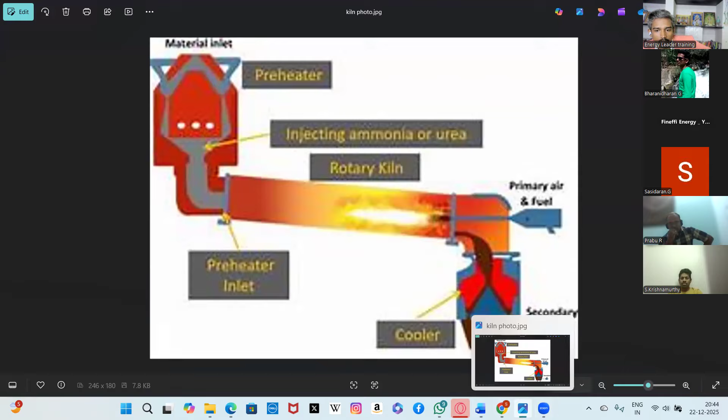There the primary air and the kiln is burning, so that 30% coal is consumed. The major consumption area is where 70% is used. So we are planning for both kiln and fluidization chamber, where carbon powder can be supplied. I am trying to combine both as 150,000 metric tons annually consumed, and taking only 10% of carbon powder to be mixed with the Indian coal, to see how much savings I will get.

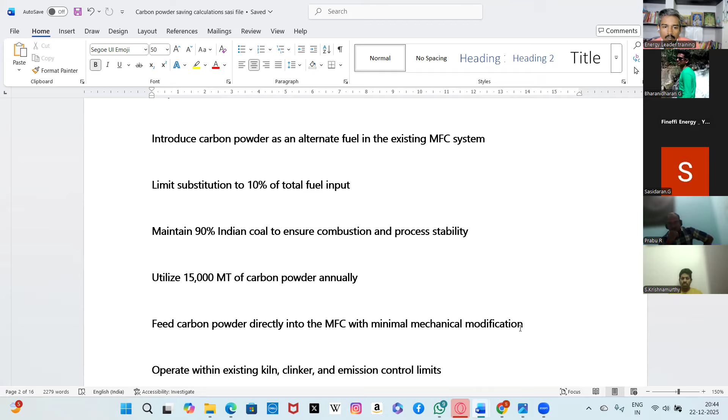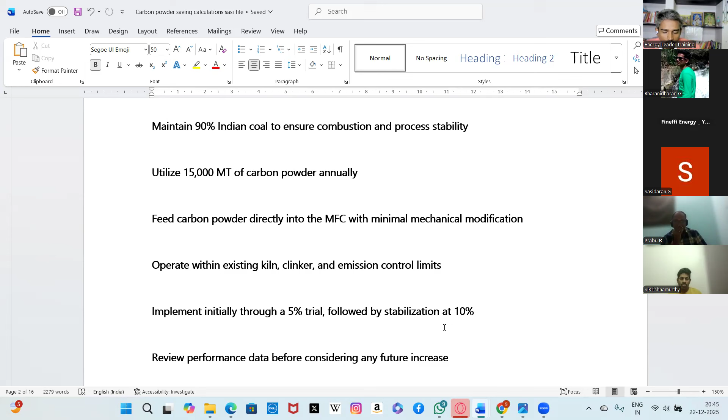So that is the proposal I have made. Carbon feeding is, in today's cement plants, an alternative fuel which boosts the Indian coal to reduce its consumption, without affecting our production parameters. First trial I am trying with 5%, and later we are going for 10%. I have the calculation for the 10%.

The explanation part is coming below. I have done some small problematic questions, through which you can understand. It involves a fluidization chamber and raw meal powder.

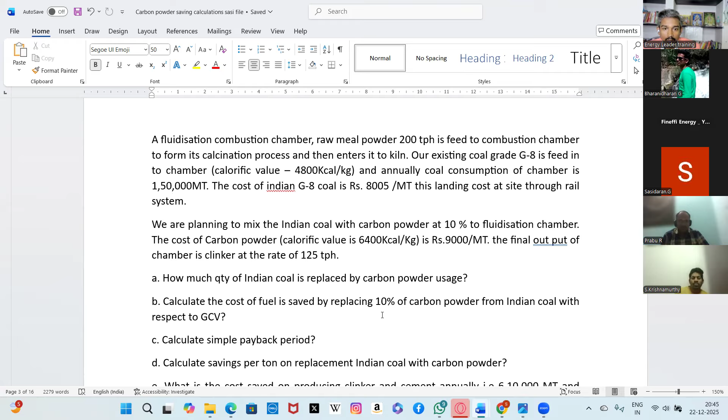What we are heating is the raw meal powder, having 200 TPH, and it comes out as 125 TPH. As I said earlier, limestone we call raw meal powder, which has a residue of 2%. It is sent to the fluidization chamber.

Input is the raw meal, and coal gives the heat to convert it through the calcination process, then it is sent to the kiln where clinkerization forms. To this fluidization chamber, I am planning with coal of 20 TPH at a GCV of 4,800 kilocalories per kg. Here I am substituting 10% for both the kiln and the fluidization chamber.

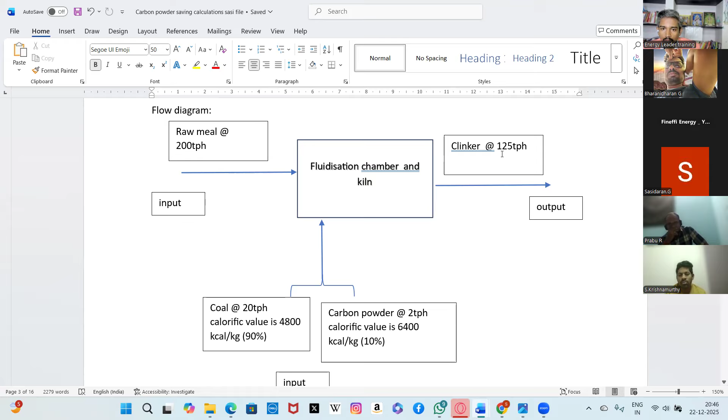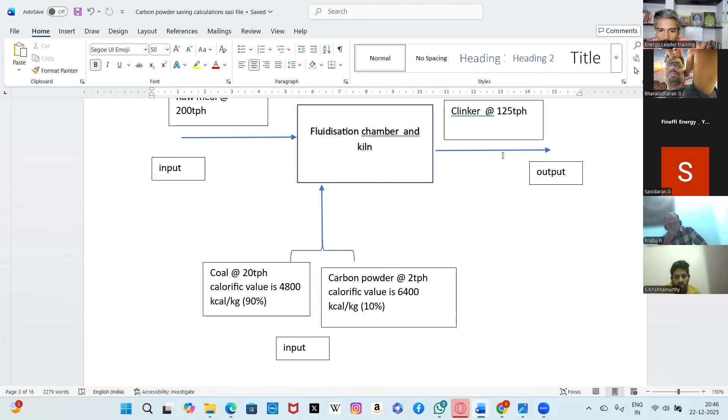So I am giving the clinker output using a conversion factor of 0.62. It comes around 125 TPH, because all the wastage in the raw meal powder is exhausted through what we call flue gas, exhausted through the preheater and going to the exit chimney.

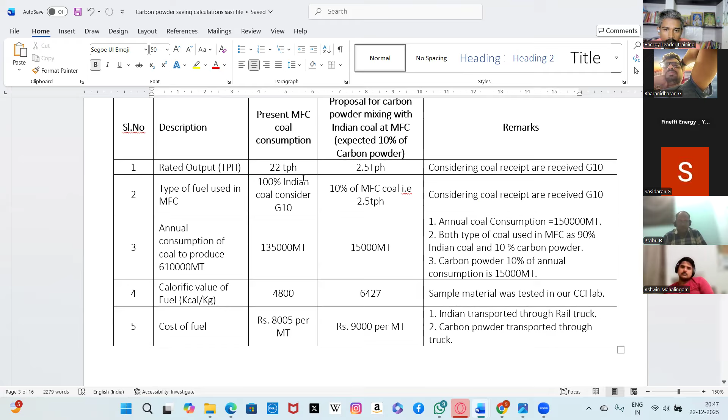This is the proposal. Our rated output for the fluidization chamber, where the coal is burnt to form the calcination process, gives us 22 TPH. Of that, only 10% I am replacing, that is 2.5 TPH. For the kiln it's the same, both combined together 22 TPH, and together I am giving 2.5 TPH as the 10%.

On calculating as a whole, 1,50,000 metric tons is the yearly consumption: 135,000 as Indian coal, and 15,000 metric tons as carbon powder. As shown in the calculation, annual consumption is 1.5 lakh metric tons, with coal MFC 90% and carbon powder 10%. So out of 1,50,000, 10% calculated is 15,000 metric tons.

The calorific value of Indian coal is around 4,800 kilocalories per kg. For the MFC, that is for the carbon powder, it comes around 6,427 kilocalories per kg.

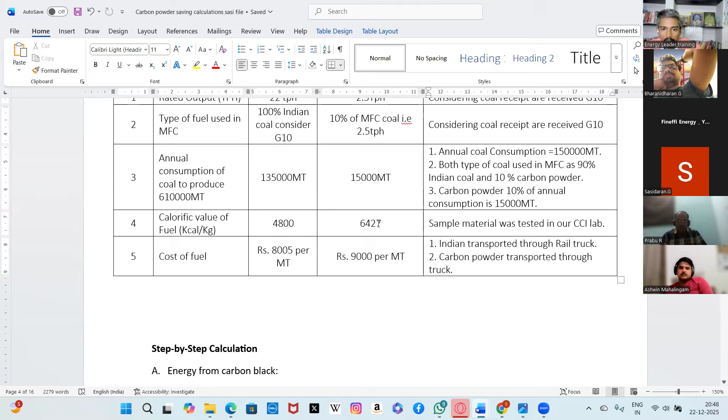The cost difference is almost 1,000 rupees, which comes to our landing cost at my plant, including transportation. Our Indian coal is coming via railway, and carbon powder is coming via trucks.

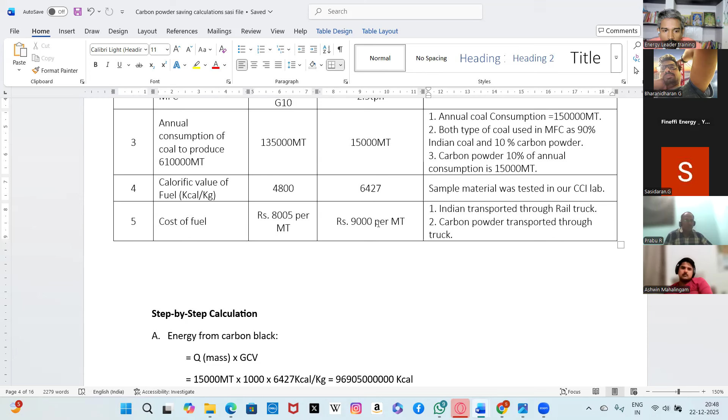So the Indian coal cost is 8,005 rupees per metric ton, and carbon powder is 9,000 rupees per metric ton.

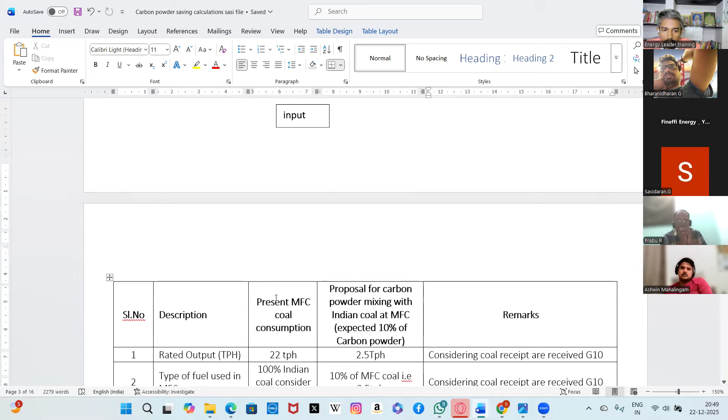Substituting the Indian coal, if I give 15,000 metric tons of carbon powder, how much Indian coal is being substituted? To calculate this, I use the formula energy equals Q into GCV. 15,000 metric ton is converted to kg, and the GCV of carbon powder is 6,427 kilocalories per kg. This much energy is generated and fed to the fluidization chamber.

Taking this as input, divided by the GCV of Indian coal, because this amount of energy, if we divide by the GCV of Indian coal, that amount of coal is being substituted by the carbon powder.

Take for example, 20,000 metric ton of Indian coal will be used if we replace the same amount with 15,000 metric ton of carbon powder.

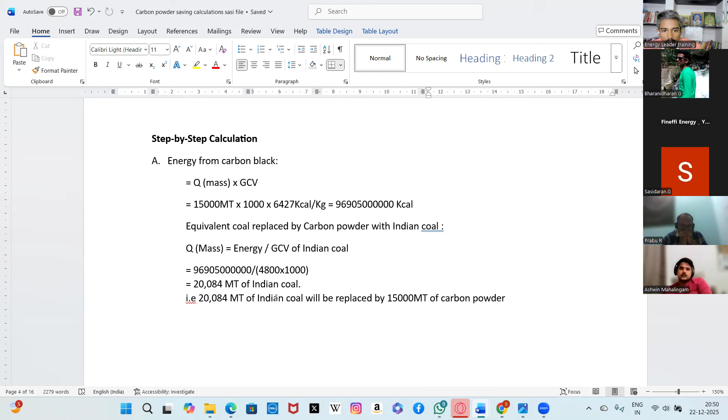So for example, if 1,50,000 metric ton of coal is being supplied to the fluidization chamber, and I supply only 15,000 metric ton of carbon powder instead, I can save 20,000 metric ton of Indian coal. So there will be a 5,000 metric ton huge saving for me.

Going with the calculations, the quantity of Indian coal replaced by carbon is 20,084 metric ton, and carbon powder cost is for 15,000 metric ton. So the difference of this coal is 5,000 metric ton.

So for 5,000 metric ton, at today's cost of Indian coal at 8,000 rupees, the saving impact is 4 crores for me. This is an annual cost saving on substituting carbon powder with Indian coal.

Okay, only 10% I'm taking up, only 10%. This is a 4 crores saving annually I'm getting.

So for handling this, for handling of the carbon powder system, there should be mechanical equipment. So which I need to invest in - mechanical equipment and electrical motors, which includes a blower, a screw conveyor, a hopper, and a conveying system where I can store the carbon powder and convey it through the blower system and supply it to the fluidization chamber.

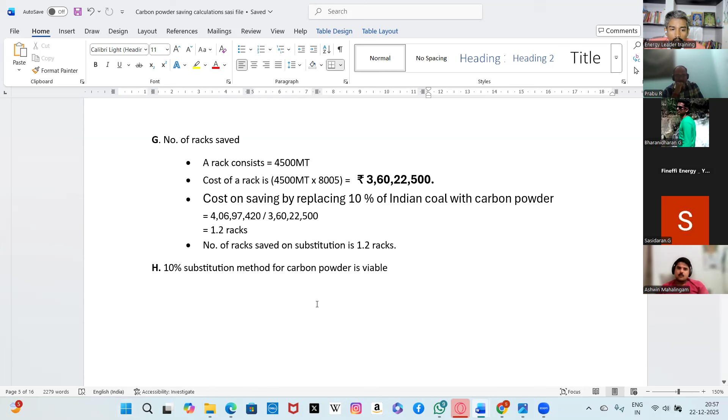Super, sir. Everyone appreciates the suggestion, sir. If you have any doubt, you can ask, sir. He will share the step-by-step calculation also. Okay, sir. That investment part, what is the investment?

This is total 70 crores, no? The total investment you put is 70 crores. It should be 70 lakhs. Ah, lakhs, yes, sir. Sorry, sir, there is a mistake. One more zero, you reduce it. Lakhs. Okay. That is correct. Now it is correct, sir.

Any other doubt, sir? You ask, sir. Prabu, sir. Similar, just a small totaling issue, apart from that it's the same. One by one, you can raise your hand, sir. Then one by one we can allow. Prabu, sir, complete your side.

That's what I see, in the totaling there is an issue. But other than that, it's a very good exercise. Really, congratulations, Sasidaran sir. You have made a wonderful work, and it benefits the organization as well as the nation. Reducing the cement price supports the infrastructure development departments who develop this country. So it's supporting the nation also.